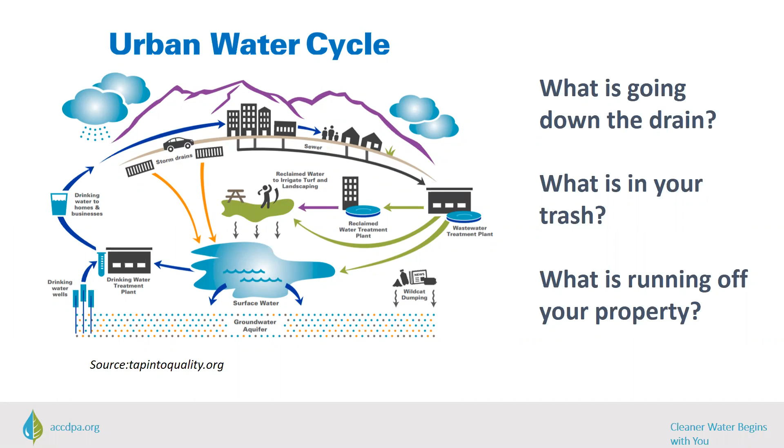Thanks again to Laura for laying this information out for us in the drinking water webinar from a couple weeks ago. Source water in Allegheny County is majority surface water, aka rivers and streams. The remaining portion is groundwater. Both of these water sources are part of the water cycle.

This is the general flow that connects our everyday actions to the water cycle and drinking water. Products we use enter the wastewater treatment system and back into a local waterway, or directly into a local waterway via stormwater runoff.

Also, full disclosure, I'm nowhere near the level of expert when it comes to the science, research, and full implications of this topic. So if this presentation sparks some in-depth questions, I'll do my best to direct you to the best resource for clear answers.

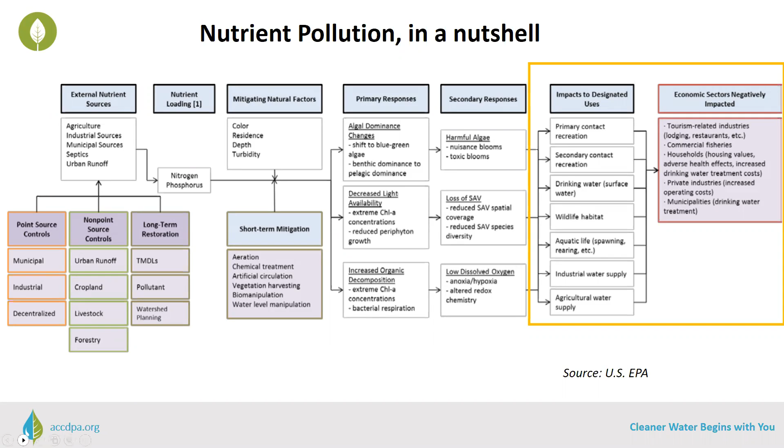So, what's the problem with nitrogen and phosphorus, which are both naturally occurring? You can focus your gaze on the outlined yellow box. Excess nutrient loading impacts everything from recreation to agricultural water supply, which can then lead to adverse health effects and increased costs, including the treatment of drinking water. From the individual level, nutrients are added to the environment largely by yard management and dog waste.

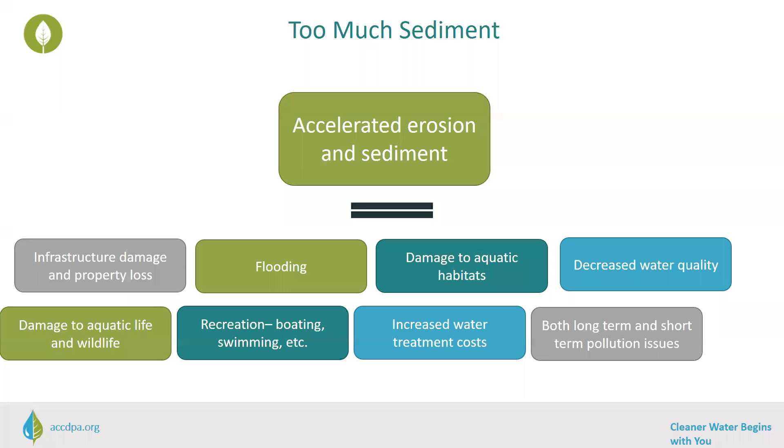In a developed environment, sediment is no longer just an innocent batch of worn down rocks. It can bind and transport really harmful stuff, which then gets carried into local waterways through stormwater discharges and overland runoff. This is problematic, both in the short term and the long term. Pollutants can stick around in the beds of waterways for years and years. All living things depend on the quality of the natural environment, including us humans. Streams, rivers, reservoirs, groundwater, they serve as our drinking water sources.

What can you do? Anything that you do on your property that slows and ideally absorbs stormwater, as well as keeps sediment in place, will help to reduce pollutants entering your local stream. Reducing or eliminating the use of fertilizers and following the application directions will also help to keep the product where it is intended. Another source of nutrient pollution is yard waste. Consider leaving leaves and grass clippings in place as a form of mulch and fertilizer.

If your preference is to get them out of sight, or if you live on a property in a dense area where there is nowhere for this stuff to go, try composting it or putting it out for a municipal collection program. I live in the city and there's quite literally nowhere for the autumn leaves to go. We have to bag it up for municipal collection. The goal is to keep clippings and leaves out of waterways and the landfill, however it is that you try to accomplish that goal to improve water quality.

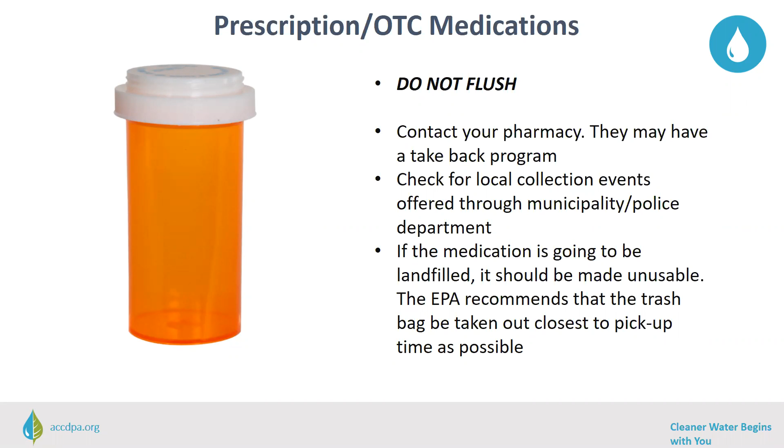If you don't see any of these options available in your area, give your municipality a call and ask if there's a way to get a collection event in your community. Try to use less of these products, consider making or purchasing less toxic products, and use the recommended amount of each product. I'll include a link to the PRC website where you can find a wealth of info on household hazardous waste and other hard to recycle materials.

Glass cleaner, bleach, dishwashing soap, laundry detergent, these are all items that contain a lot of extra chemicals that are not necessarily important to get the job done, but contribute stuff potentially making its way into the environment. Consider using white vinegar, baking soda, and store-bought products with fewer ingredients that you can pronounce. I use vinegar and baking soda exclusively in my house as a multi-purpose cleaner, and will only bring out the big chemical guns when I face a pretty big cleaning challenge.

Personal care products are all worth considering for both your health and water quality. I learned some really surprising things when I was preparing for this presentation. This is a largely unregulated industry, and if a company does receive health-related complaints, it is not required to share them with the FDA, which further limits our understanding of potential impacts. Try to swap out some of your personal care products for others with simpler ingredients, and try to avoid stuff with fragrances when possible.

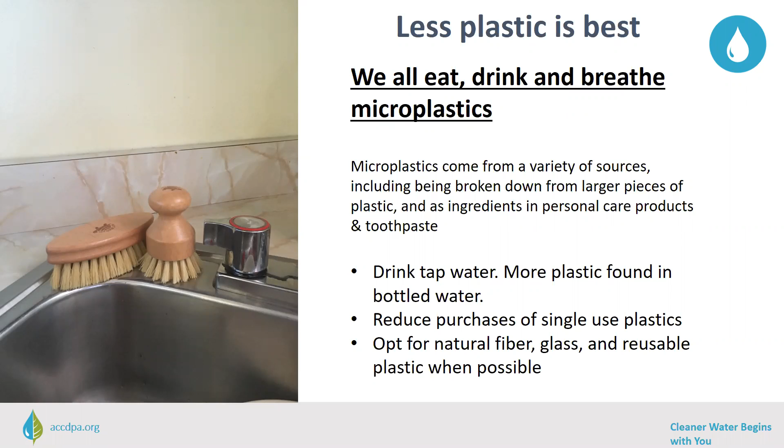Where can you be exposed to PFAS chemicals at home? Food packaging, household products like nonstick pans and cleaning products, dental floss, and stain and water repellents. There is no simple switch from one type of chemical to another to give products the function that's needed. That goes for many of the other products mentioned in this presentation. A great way to help is to use less and to read up on what you're using.

Lastly, get involved in your local watershed group. This is a great way to get involved in projects like water quality monitoring, tree plantings, litter cleanups, and educational events. There are a number of local groups in the area and opportunities to get involved with once we are back to normal. I'll include info on local groups following the presentation.

Although this presentation might be a bit overwhelming, there is a positive side to all of this. As all of our actions add up for negative impacts, the same principle applies to positive impacts. Use less, properly dispose of and recycle products, consider alternatives, and spend time reading up on stuff.

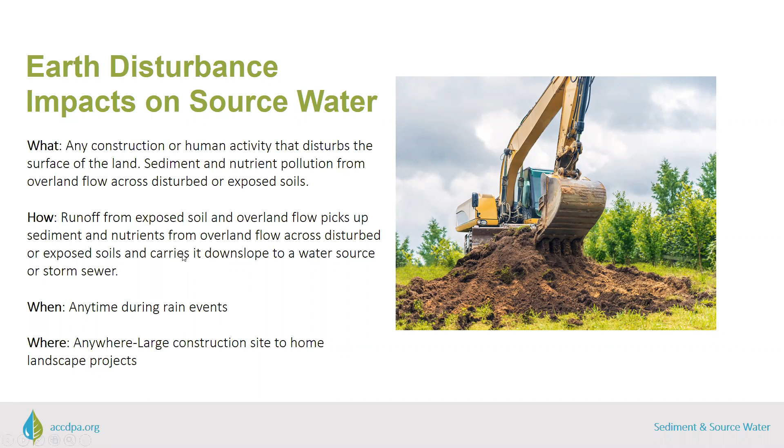So, as a result of this, each state has regulatory requirements for earth disturbance activities. In Pennsylvania, these requirements can be found under Title 25, Environmental Protection. It contains all of the Commonwealth's environmental regulations, and it's organized by chapter. Chapter 102 deals with erosion control regulations and covers both erosion control requirements and stormwater management requirements.

The authority for these regulations, as in the actual law passed by the legislature, comes from the Pennsylvania Clean Streams Law. The Clean Streams Law originally passed in 1937 and has been amended several times since, but the purpose is to preserve and improve the purity of the waters of the Commonwealth for public health, animal and aquatic life, industrial consumption, and recreation.

So what exactly does 102 regulate? Chapter 102 regulates earth disturbance and requires persons conducting earth disturbance to implement best management practices to minimize accelerated erosion and manage post-construction stormwater. Best management practices are activities, facilities, measures, planning, or procedures that help minimize accelerated erosion and manage post-construction stormwater. And we'll talk about some specific examples in a minute.

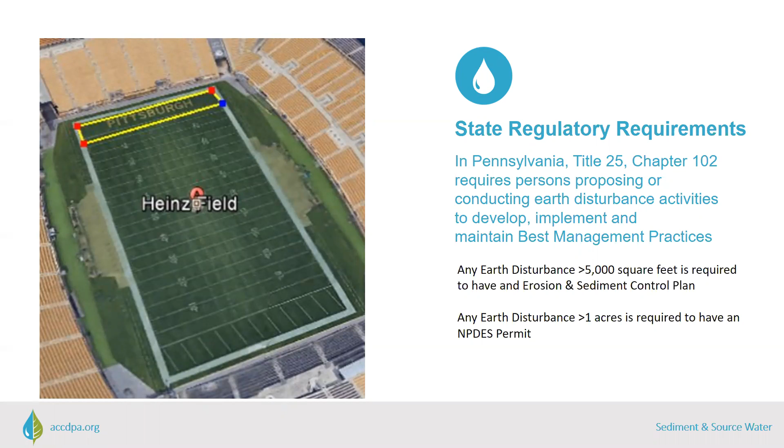So the main takeaway is that no matter the size of the earth disturbance, best management practices are required and should be used. So this can be as simple as seeding and mulching right after a small home project, or putting up silt fence down slope of a small driveway grading project. BMPs are needed for any earth disturbance activities.

Work in and around streams has its own set of requirements under Title 25. These requirements are found in Chapter 105, Dam Safety and Waterways Management. Essentially, this chapter regulates construction in and around streams, the 100-year floodway, wetlands, and other bodies of water. Chapter 105 regulates obstructions and encroachments, and these come in a wide variety of project types, such as bridges, utility lines, dams, docks and marinas, retaining walls, flood control projects, and the list goes on.

Subchapters in the 105 regulations set forth regulatory requirements for different project types. Generally, projects fall into two permit types. General permits are projects that are similar in nature and can be adequately regulated with a standardized set of specifications and conditions. These include projects like utility line stream crossings, stream stabilization up to 500 feet in length, small docks, temporary crossings, and minor road crossings, to name a few. Projects that don't meet the criteria for a general permit will need to get a joint permit that will be reviewed by DEP as well as the Army Corps of Engineers.

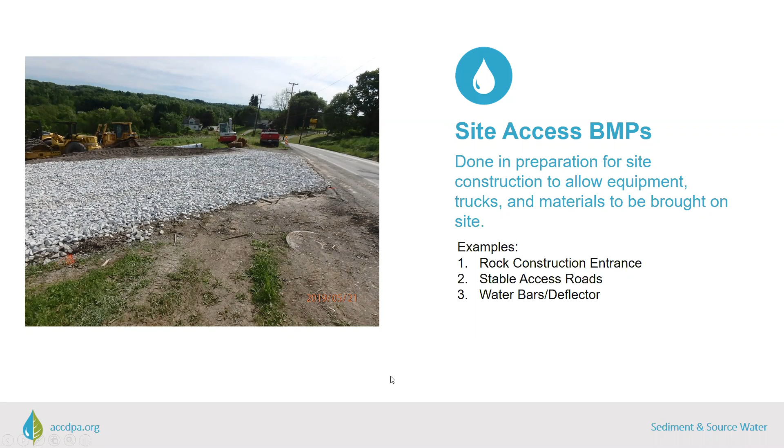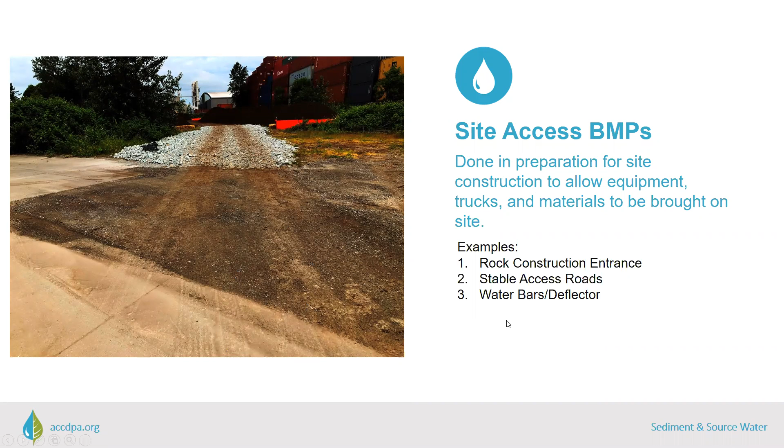These BMPs do have maintenance requirements, and they should be cleaned regularly so that mud is not tracked onto the roadway. If it does get onto roadway, it can enter storm sewers and be discharged to streams. So if you look at this picture, this entrance should be cleaned and new rock applied.

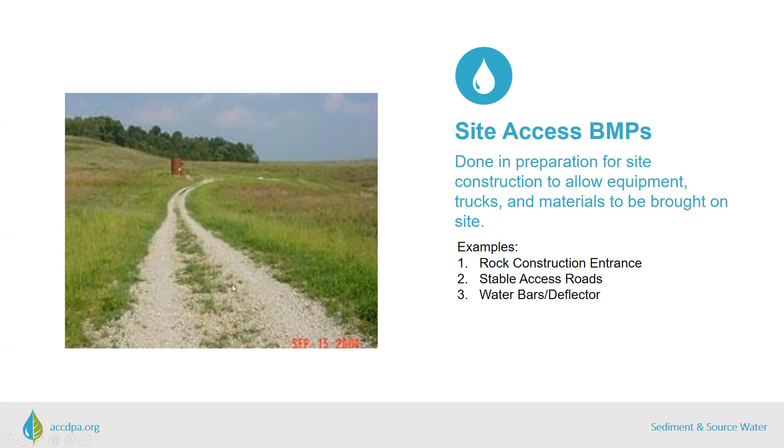Access roads should have a stable base that is able to shed water to either a vegetated area or another BMP for treatment. If you look at this access road, it obviously does neither of those things, and during a rain event would cause erosion and sedimentation issues. Finally, some access roads use things like water bars or deflectors, like this one you can see in the picture, to carry water off the road surface, typically to a vegetated area or another BMP.

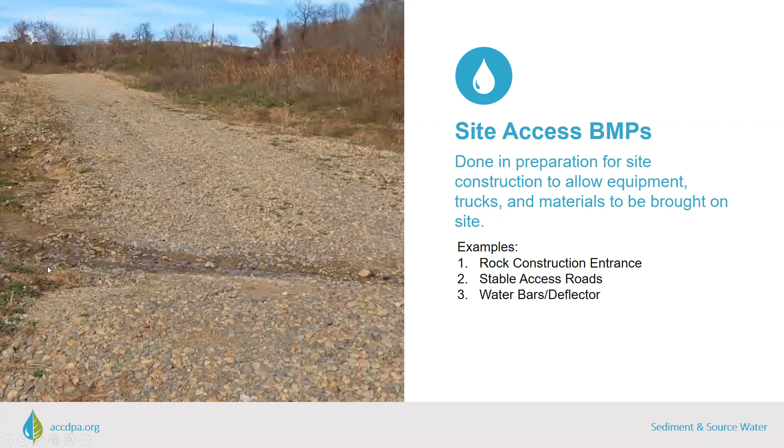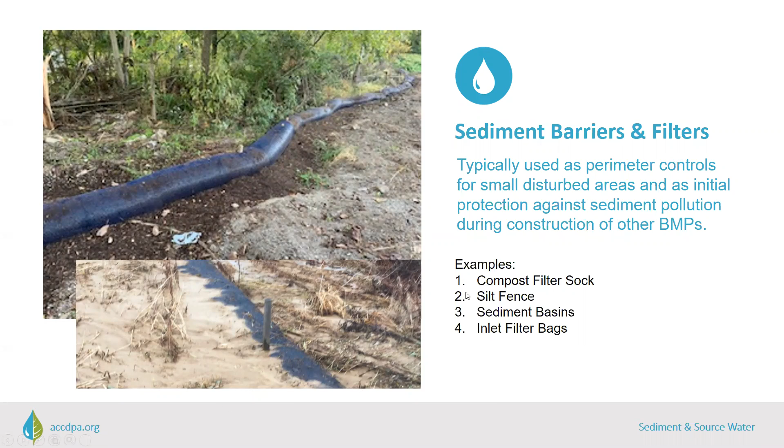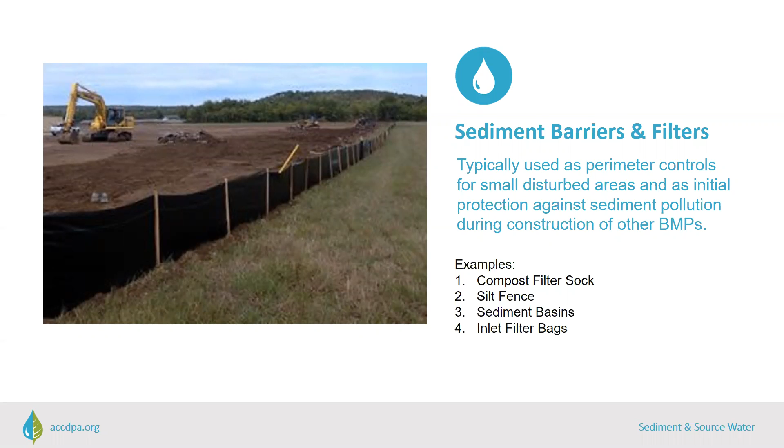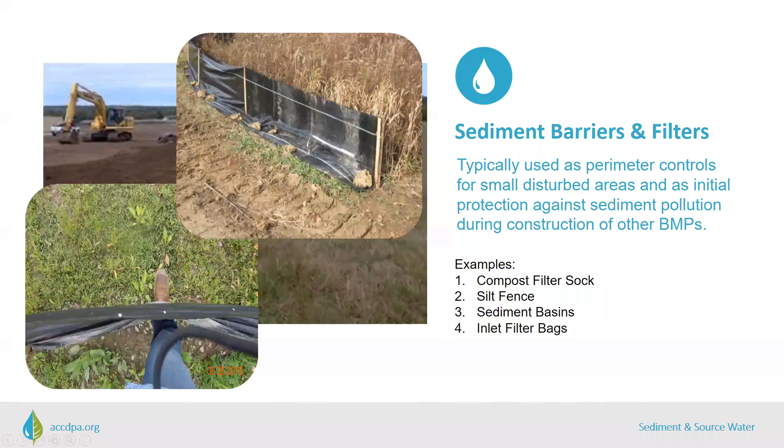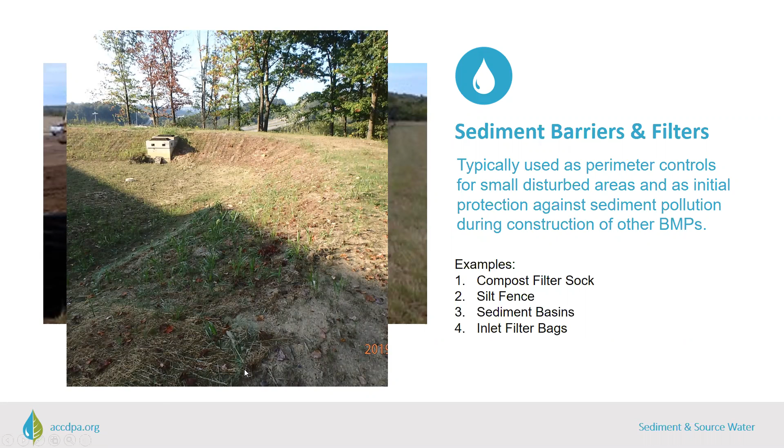Sediment basins are sized for larger areas. Runoff is directed to the basin where the water is stored while sediment settles out over time. Clean water is then released. And these also have to be cleared out at a certain elevation. So typically you'll see a stake somewhere in the sediment basin that has an elevation marked on it when it needs to be cleaned out.

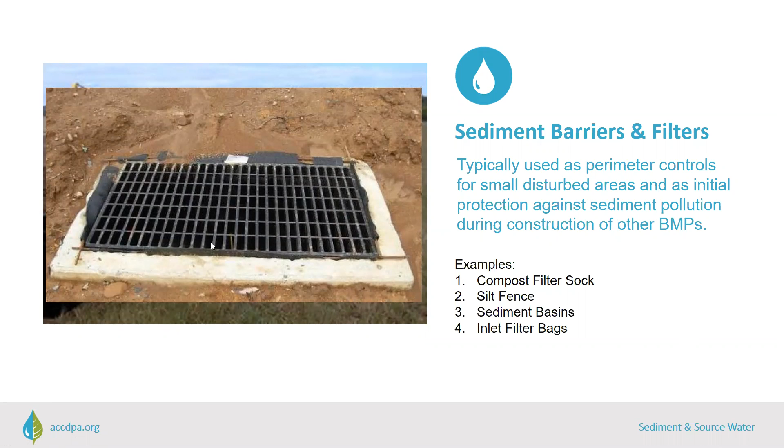And lastly, during construction, inlets that receive any kind of runoff from exposed soil should have an inlet filter bag. It sits inside the inlet. You can see kind of the post there and the outside of it. And that lets clean water through and traps the sediment within the bag. But if it's not maintained, they can clog and back up water onto roadways like you see here.

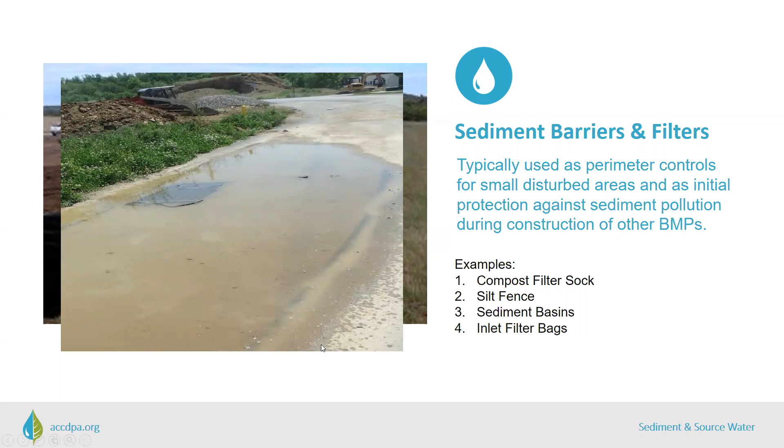And those are some common BMPs that you would see on construction sites, but how can you help as a resident? Simply knowing where your source water protection area is can be beneficial. Laura provided some resources in her presentation about where you can find that information. If you're planning any type of project, be it small or large, you should be aware of the regulations that I talked about and use the BMPs mentioned in the presentation. And always, always stabilize any soils as soon as possible.

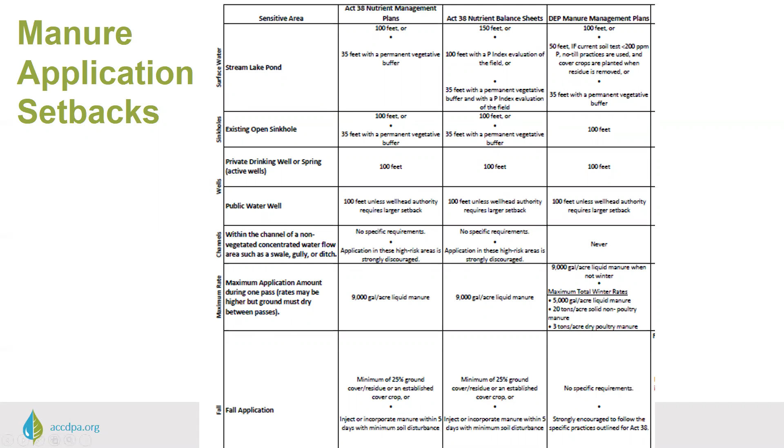The second strategy or best management practice for ag operators is to divert water. And that's what we call keeping clean water clean. So rain that is coming down onto the operation, that's clean water because it hasn't yet been contaminated with manure or fertilizer nutrients. And so making sure that that clean water doesn't run through a possibly contaminated area is really important.

Another way that farmers can divert clean water is by installing a berm or a diversion on an upslope area from a barnyard or an area where animals spend so much time that vegetation is not able to fully establish.

Another strategy is covering permanent manure piles or manure stacks. And for some people, this looks like having a permanent structure like a roof or a designed manure storage. But for others, this could be as simple as covering manure stacks with tarps. This ensures that the stormwater, this clean water, isn't coming and infiltrating down through the manure pile and potentially leaching manure nutrients into the water table.

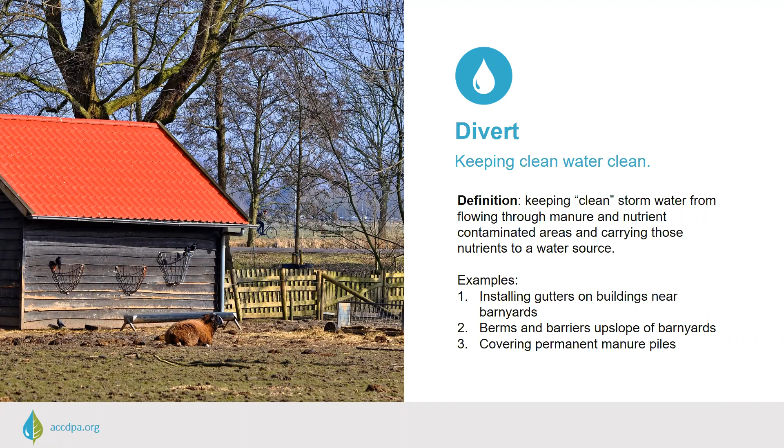The third strategy is to mitigate, and that is using strategies to treat or prevent runoff before it reaches water sources. So one of the ways that we can do that is with a vegetative treatment area. So you have your barnyard, and then where the water exits the barnyard after it's flowed through, it can go through a vegetated area. And these areas have specific requirements, but the idea is that the manure nutrients will flow through the vegetation and be captured better than if they were flowing through a bare area.